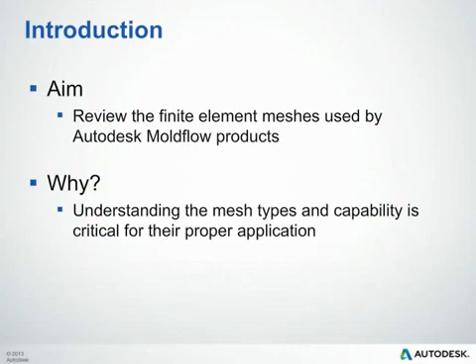In this module, we'll cover a brief overview on finite element analysis, also known as FEA. The goal of this module will be to review the finite element mesh types used by the Autodesk Moldflow products. Why do we want to do this? It's important to understand the mesh types and their capabilities because that's critical in order to use them properly.

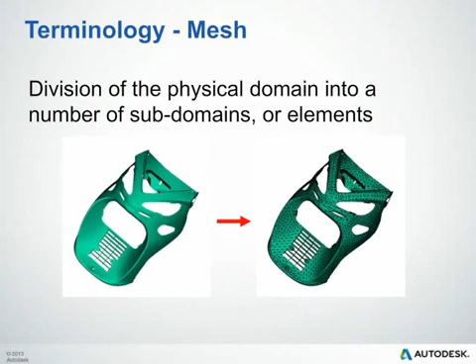Just so we're all on the same page with our terminology, we'll define what a mesh actually is. A mesh is basically a division of a physical domain into a number of subdomains or elements. So basically we're taking your CAD part and breaking it into several small components, almost turning it into a puzzle, you could say. These subdomains that we broke your part down into, we call those elements.

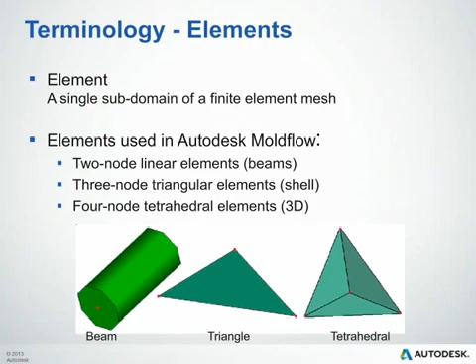Those elements that we previously discussed all have nodes. These nodes determine a coordinate position in space. They are also places for us to put boundary conditions such as injection locations, coolant inlets, vent locations, things of that nature. In a mesh, these nodes are basically at either end of a beam, and at each point of a triangle or a tetrahedral element.

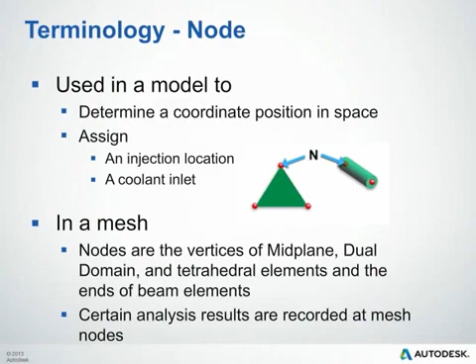Certain analysis results are recorded at these nodes, such as velocity, pressure, and temperature calculations, so they're very critical in the analysis. Now, this might not be very apparent for Autodesk Moldflow Adviser users, but there actually is a mesh, or a meshing process that is automated in the background for you.

So beams are used in Adviser for cooling channels and feed systems. And then for your part, you typically have a choice between a dual domain mesh or a tetrahedral mesh, or some call 3D. We'll explain this in a little more detail later on and why you might use one over the other.

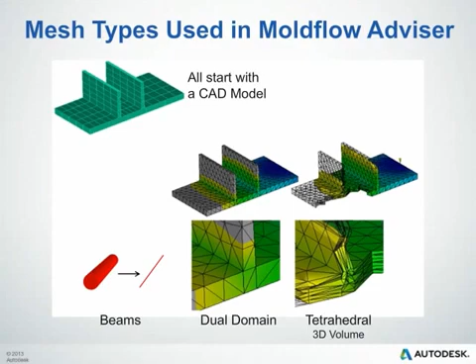Here you can see an example of a dual domain mesh versus a 3D mesh. 3D mesh is typically more optimal for thick-walled parts or capturing complex flow fronts. In this example, you can see the dual domain mesh is having a little bit of an issue capturing that flow front on the top part, whereas the 3D mesh is not.

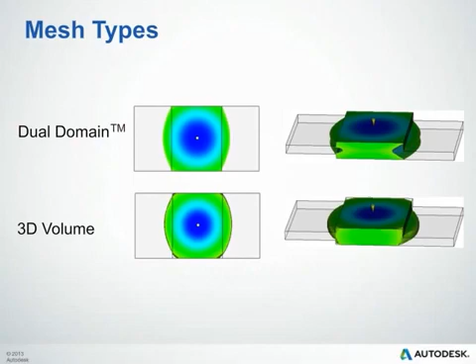Our dual domain mesh type is something that's proprietary to Autodesk Moldflow. Some also commonly refer to this as a 2.5D or 2.5 dimensional mesh. It's not a true 3D mesh in that we don't have elements and nodes through the thickness of the part to do our calculations at.

However, we can still get profiled results and see what's going on through the thickness and offer a true 3D representation of that part from a geometric standpoint, as opposed to midplane, which is a single surface through the thickness. With the dual domain mesh type, we have connector elements that allow us to synchronize results from the top and bottom surfaces of the part.

As the flow front progresses through this part, we should keep it synchronized through the profile of that part, and that's what these connector elements help us do. They also have zero flow and heat resistance, so they're not affecting anything in that aspect.

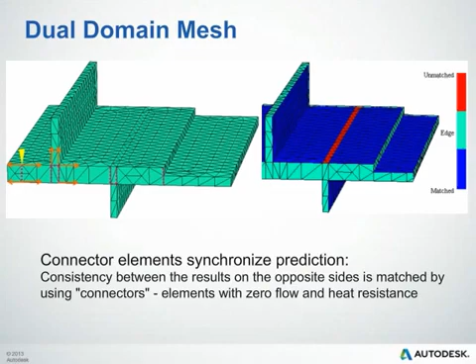The reason we say this is because we're using the Hele-Shaw model for this. So what that does is we're assuming laminar flow of a generalized Newtonian fluid. Inertia and gravity effects are ignored. That's not such an issue with thin-walled parts, but could be if you're trying to simulate jetting in thick-walled parts. In-plane heat conduction is negligible, thermal convection in the gap-wise or thickness direction is neglected, and heat loss from edges is ignored.

So the main thing to take away from this is that we're neglecting heat transfer on the edge of that part. So when you're analyzing thin-walled parts, that is negligible. However, when you get into these thicker-walled parts, you are ignoring heat loss through a significant amount of surface area on your part. So that can impact how we're predicting the part cools. So thin-walled parts, again, it's pretty negligible. Thick-walled parts, it's not a good idea to run the dual domain mesh type on.

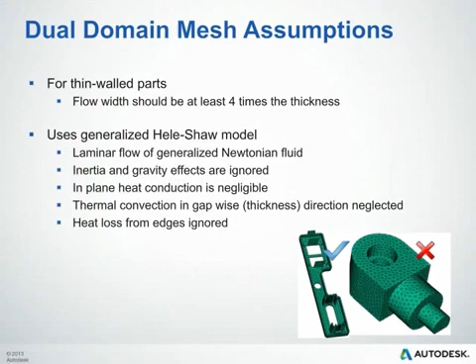So for dual domain, the flow front growth, what we're doing is basically saying the flow front grows to connecting nodes from an injection node. So if you look at our image here on the right, that number 1 dot in yellow, that's where our injection node is. That's going to be filled first, and then naturally we're going to grow outward to nodes 2, 3, 4, 5, 6, and 7 there. As those fill, the surrounding ones from them will fill, and so on and so forth.

One thing we'll also want to take note of is that the melt temperature is homogeneous entering the mold. You tell us what the melt temperature is, and that's how it comes into the tool or into this injection location. And then we're also saying that the polymer freezes as it hits the mold wall.

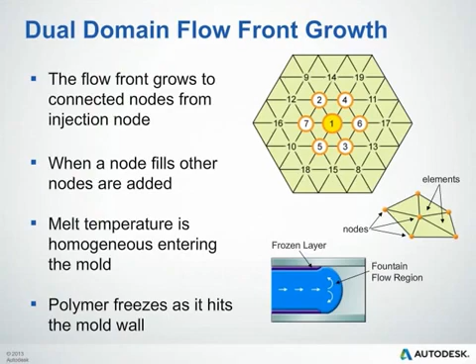Now for tetrahedral mesh assumptions, we'll get into these in a little more detail. As we mentioned, the tetrahedral mesh or the 3D mesh is designed for thick and chunky geometries. We're using a full 3D Navier-Stokes model, which is solving pressure, temperature, and all 3 velocity vectors at each node through the thickness of this part. So that's what allows us to capture these complex flow fronts and what's truly going on through the thickness of the part. We're also seeing heat conduction in all directions, so we're not neglecting heat loss through the edge elements.

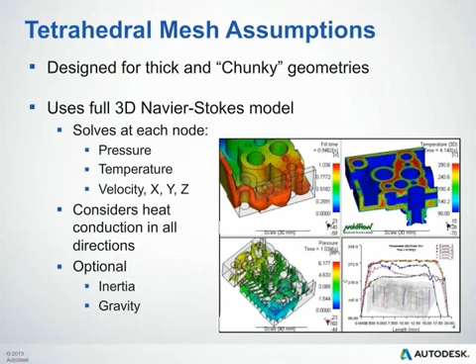We can also see inertia and gravity effects. So if you're trying to simulate special things such as jetting, then inertia and gravity can play a critical role there. Now you might say, why don't I run 3D all the time? The thing with 3D is that you're increasing your element count. So you shouldn't run 3D in every situation. If something is suitable for dual domain, then certainly run it in dual domain. It'll save you analysis time and model size, and it will reduce the hardware requirements you'll need to run that model. So 3D is not always the answer.

So which of the following mesh type options can you choose from in Adviser? A mesh is defined as a division of the physical domain into a number of subdomains, also known as elements. True or false? The dual domain mesh option is intended for thin-walled parts. True or false?

When using a dual domain mesh option, heat loss is considered in all directions. True or false? A 3D mesh is suitable to be used on any part geometry. True or false?